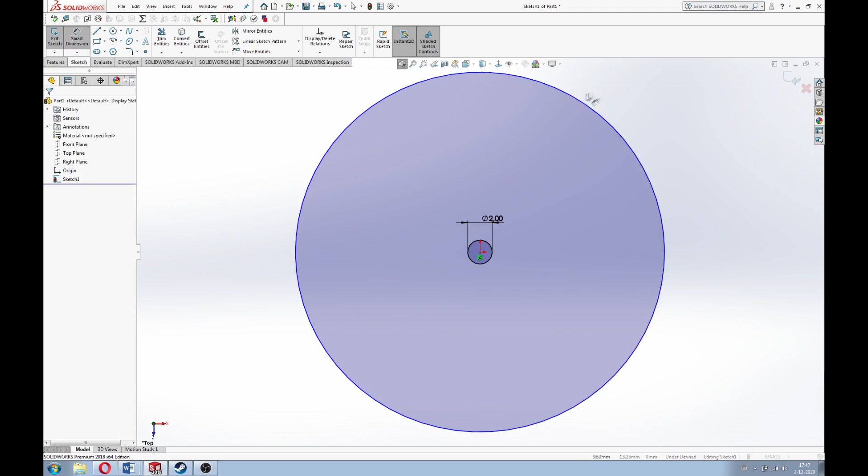Hey guys, now if you see my last few videos, I guess I can't deny I love doing weird stuff. A 3D printable lighter might sound horrible, and it is. Most polymers can barely reach 100 degrees Celsius before they turn into a melted mess. It's about the worst material you can possibly choose. And that's the reason why this challenge is fun.

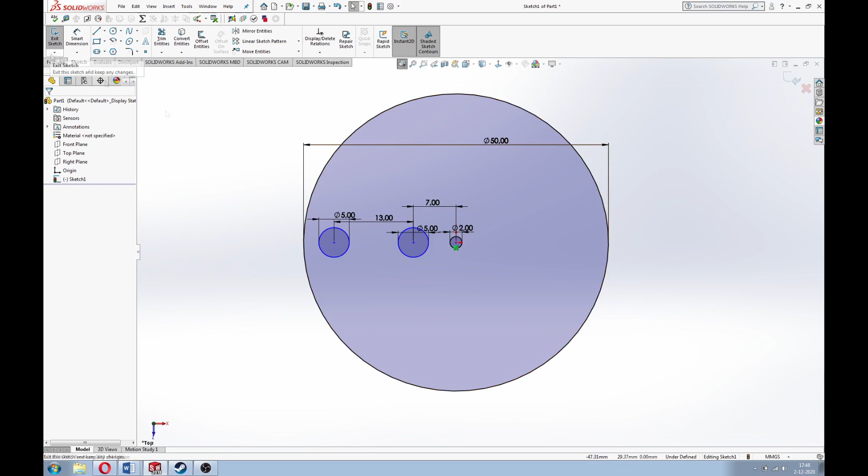If you use just plastics, it would last 30 seconds at most before it explodes. But the goal is at least a minute. My end goal is actually around 5 minutes. And it's actually for a future project where I'll need a constant heat source that is 3D printable.

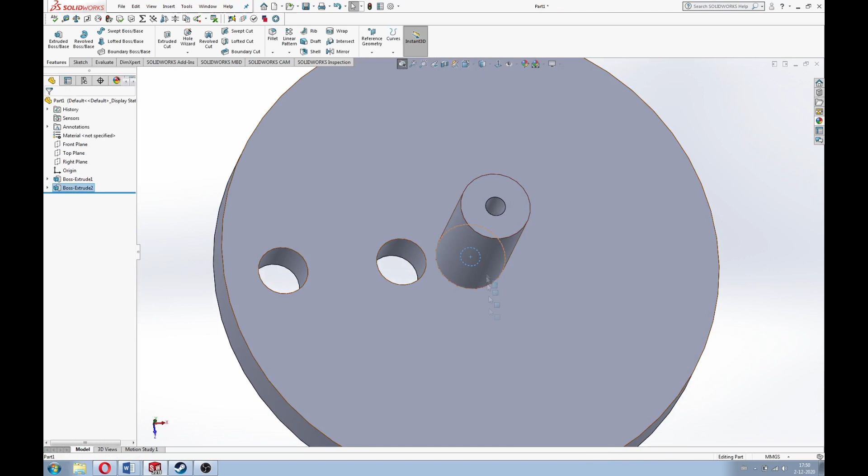My idea was actually to water cool the entire thing. If the boiling point of water is hopefully the highest temperature of the entire lighter, while it will soften a bit, it won't completely melt, so it wouldn't explode. At least if you use PET. If you used PLA, it would melt completely.

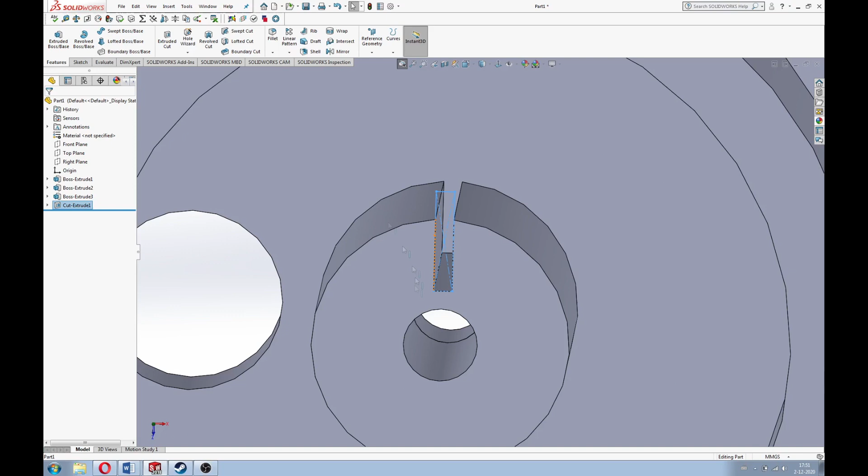Now the model filmed here is the first prototype. If the design is promising, I'll just keep working on it until I have a perfect design.